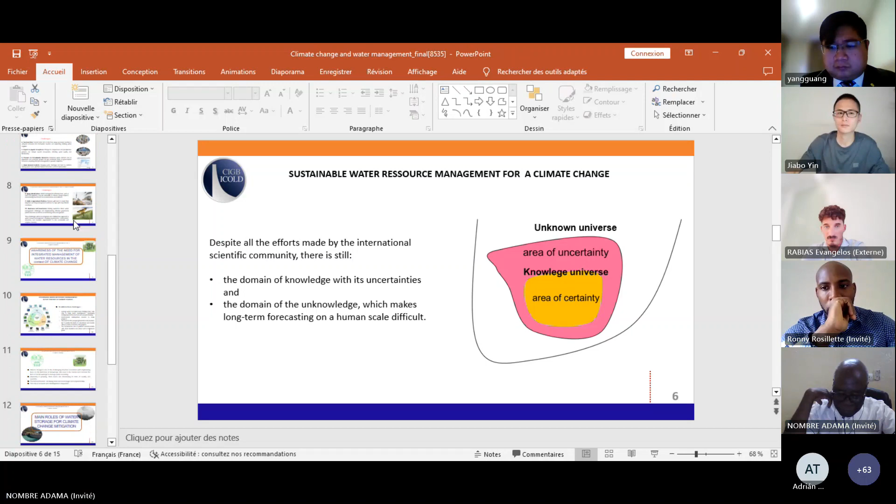The fundamental role of a political decision maker, with short deadlines and values such as maximum profit, is not in adequacy with the scale of thinking, the scale of addressing the global climate change. And we see at the international level the difficulty to achieve agreement, even though we have progress at the international level.

Climate change is one of the challenging situations associated with engineering based on the limitation of knowledge. We need to be careful and consider the best of our knowledge to manage water accordingly, improving our work as our universe of knowledge is enlarging.

Humanity is growing, the needs are diversifying in terms of quality and quantity. The natural hazards are becoming larger and more unpredictable. The role of research and development in these conditions is very important, and I am sure that young engineers are very interested in this area.

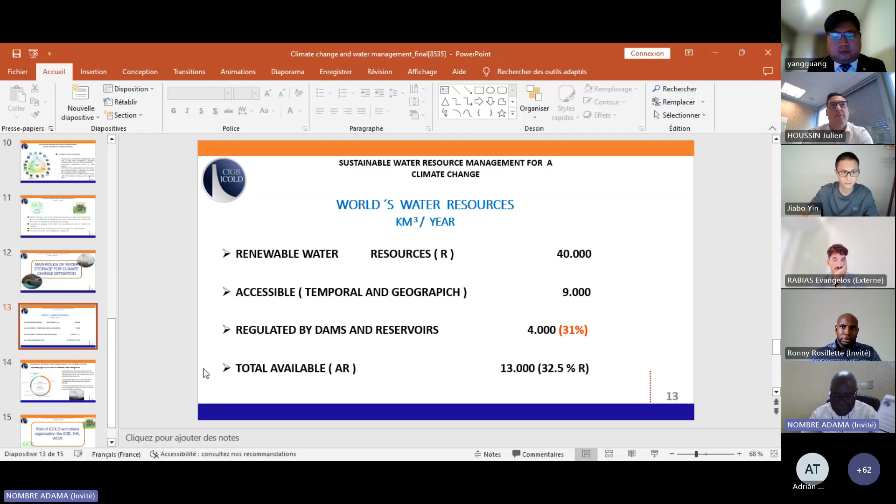I take the example of renewable energy. Solutions are coming, and we need to think globally. We need to extend cooperation. We need to extend understanding between people to get the best result of our process. And to give some data according to the IEA annual report for 2022.

Hydroelectric production between 3,449 and 4,327 terawatt between 2010 and 2021. This represents 15% of the global electricity production. Hydropower represents more than 80% of the renewable energy generation and prevents emissions. Hydro generation prevents the use of wood fuel in less developed countries and reduces the rate of deforestation and CO2 emissions.

And in the context today, we are seeing a lot of progress. Floating photovoltaic panels are becoming important in the area of energy. We also have the development of PSP, not for energy only, but to store water for the different uses.

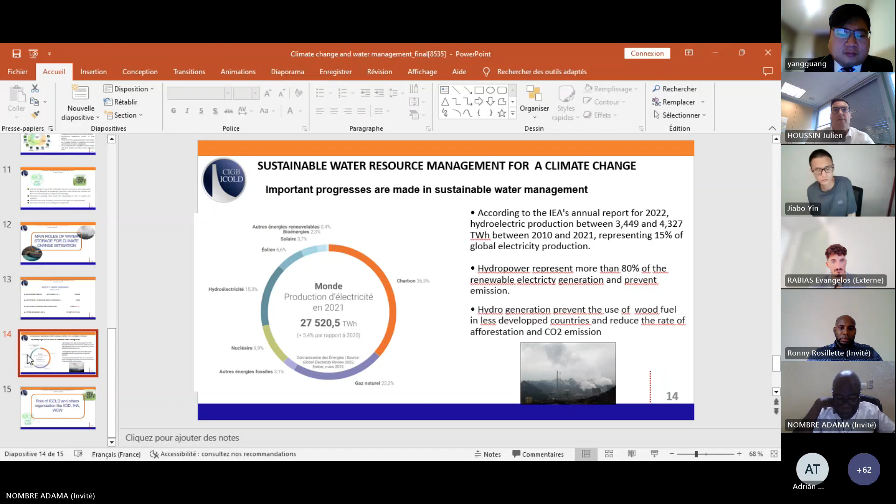And now to end my presentation, I will talk about the cooperation between ICOLD, ICID, IHA, World Commission on Water, who have made a lot of progress. If I take the example of clean water, access to clean water has been recognized and decided by the United Nations as a fundamental right, and it's important for our ethics for the future, also in working within the climate change domain.

And ICOLD also is working hard to contribute by publishing bulletins on dams and environment, by reinforcing capacity building for young engineers, but also for engineers coming from less developed countries. If I take the example of IHA, we have the IHA protocol for hydropower, which is taking an important part of the global climate change, and the United Nations are working hard to increase our knowledge, to reduce uncertainty in the universe of our knowledge.

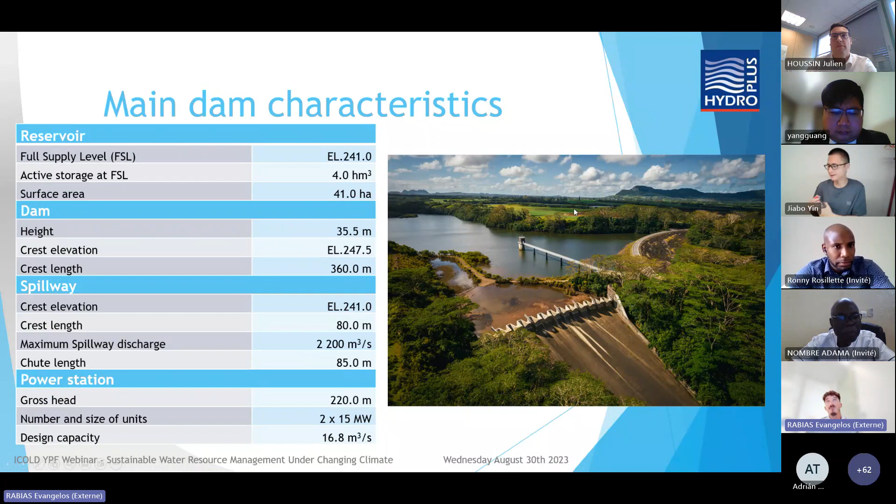The objective of the project was the installation of fuse gates on the spillway crest in order to increase the reservoir capacity by 3 meters, which results in an increase of the storage by 1.36 million cubic meters, which also results in an increase of the power generation from 3 gigawatt hours to 10 gigawatt hours per year. It's not a huge number in general, but for the island of Mauritius, it's significant.

So what were the benefits? More water available, more clean energy from 3 to 10 gigawatt hours per year, a boost in the hydro capacity of the power station due to the increase of the head of the turbines by 3 meters. And this enabled the reduction of the existing thermal energy production, because they have some thermal power plants, and a further reduction of the CO2 emissions by 1,800 tons.

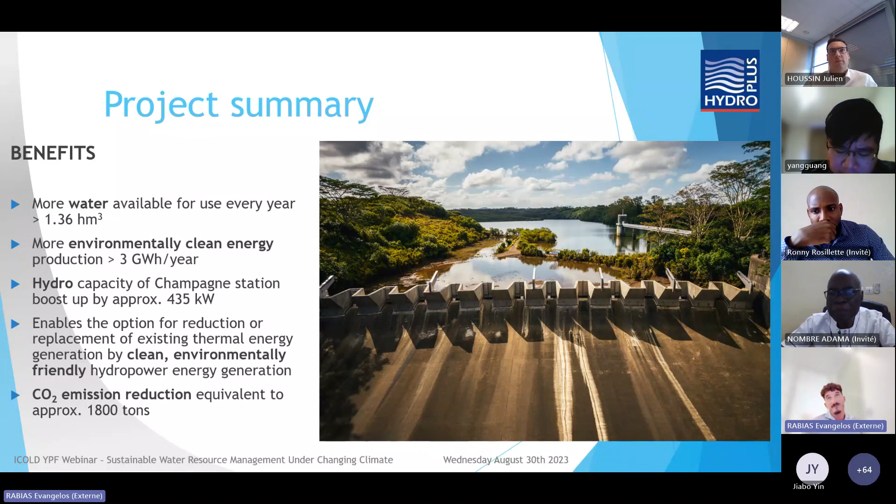The design and the works had a total duration of 12 months. Design was approximately 4 to 5 months, and the remaining 6, 7 months were the works. During the works, we had to develop several methodologies to adapt to the technicalities of the project. Of course, the highest safety and quality standards were enforced. During the works, we had to successfully respond to 3 flood events. They were not minor. They were maybe 10 to 50 year floods. And also we had the COVID restrictions, and we managed to complete the project 1 month in advance.

To talk a little bit about the technical solution, which is the actual innovative element of this presentation, it's the fuse gate system. Fuse gates are freestanding blocks, you can see them here, made of concrete or steel.

In this project, we had a structure, a base, you can see here in the 3D model, that was made from steel, and it was retrofitted in order to match exactly the shape, the curved shape of the spillway. And then we cast in place the concrete walls, and at the end, the well, which is also from steel.

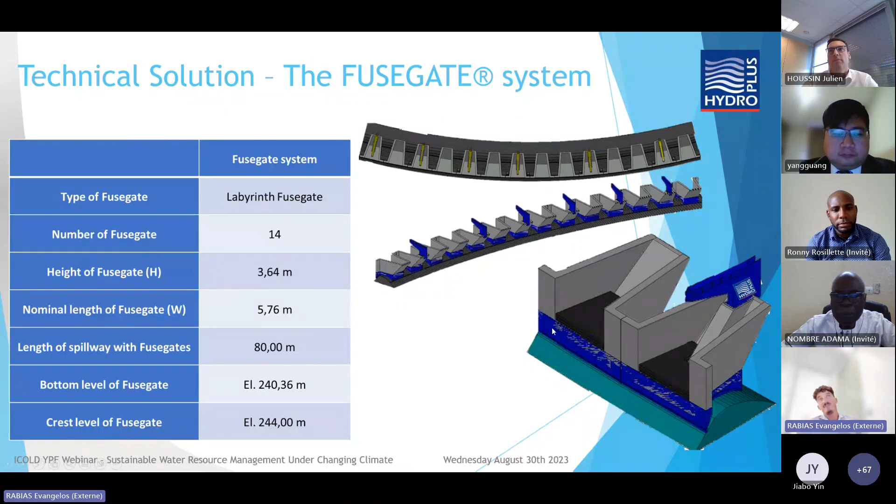from the initial spillway crest, which is here, to the new fuse gates crest, which is here. So all this height is the additional increase in the storage capacity. For this project, we had 14 units, 3.64 meters high, and the shape was labyrinth.

How does it work? For all the normal conditions, water is stored behind the fuse gates. So this is the extra capacity. When we have the normal flood events, water is able to overflow above the fuse gate crest, just like a normal labyrinth spillway.

At the conditions that we have exceptional floods, let's say the 100 years flood, the 500 or the 1000 years flood or above, water will start to overflow over the fuse gate crest, and the reservoir level will start to rise. At some point, it will reach a predetermined elevation, which we design and set during the design phase, and water will start to reach the elevation of the entrance point of the inlet well.

So as soon as the water starts reaching here, it will enter the well, and this well has direct access to the bottom of the fuse gate, which is a hollow chamber that is empty. Water will start to fill up. It will create an uplift pressure, and this uplift pressure will create the triggering mechanism for the fuse gate to be flushed away. How is it flushed?

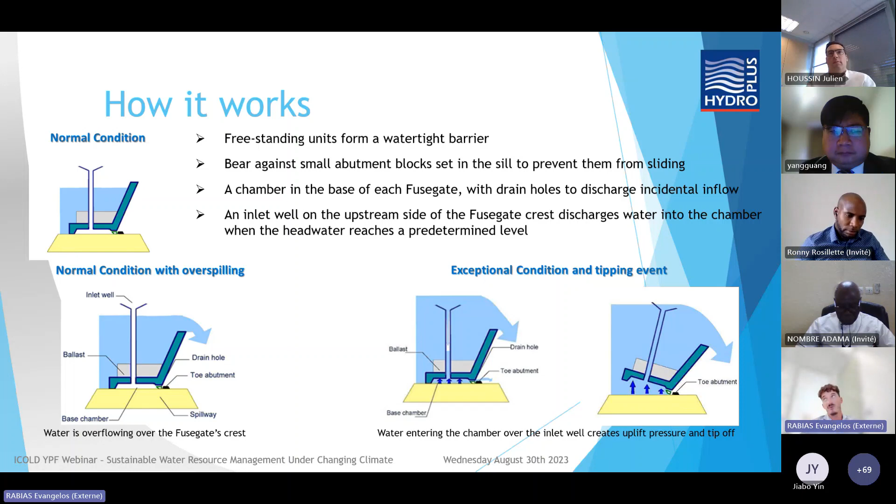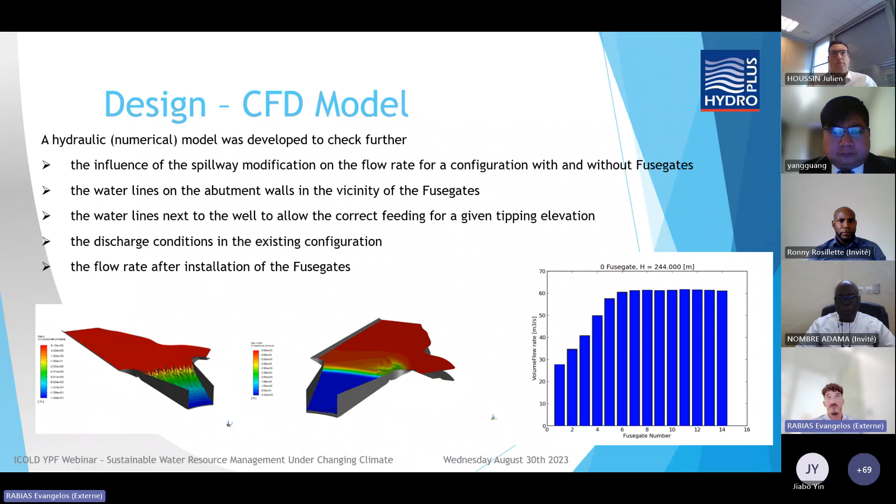So normally, for this project, the first tipping happens for the, I think, 200 years flood, if I'm not mistaken. Before that, before the 200 years flood, all the fuse gates will stay in place. During the design, we developed a CFD model in order to check the hydraulic characteristics of the fuse gates and of the spillway all around.

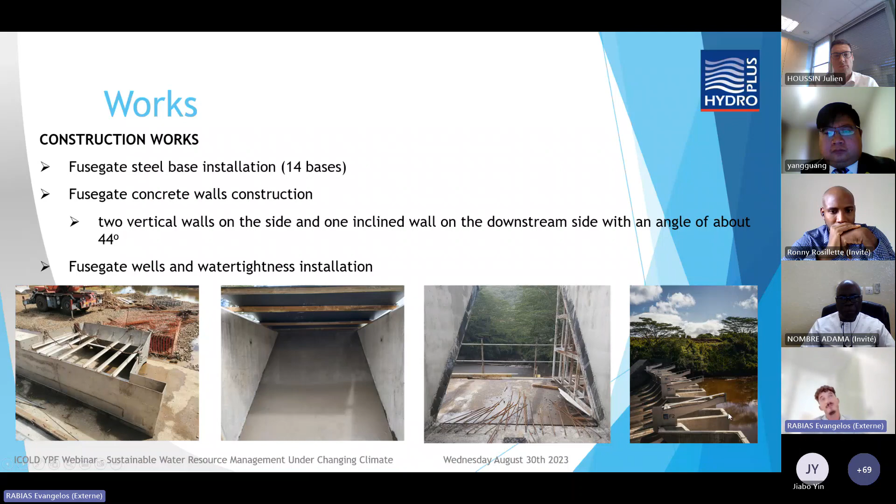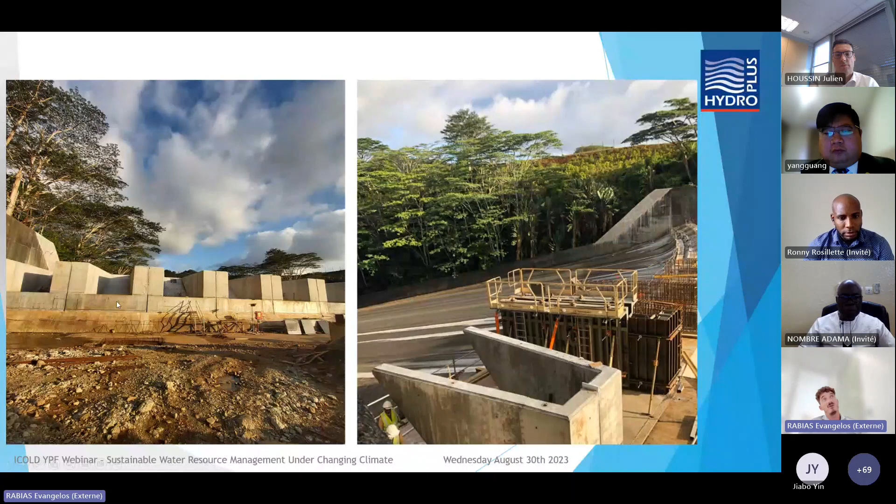Some photos from the construction: the concreting, the start of the concreting of the base and the walls. This is how it looked after the completion of some elements, and this is during the construction of the walls.

To summarize the benefits, the dam was optimized with a cost-effective solution in less than a year. Water storage, sustainable development of water storage infrastructure, optimization of flood management. The overall safety of the dam was enhanced to protect people and properties, and all that without changing the initial characteristics of the dam. Maximum water level stayed the same. All the initial stability design stayed the same. Nothing was changed.

The reservoir capacity was increased, 31% for the dam. More water available, more energy available, from 3 to 10 gigawatt hours per year. A boost in the hydro capacity, a reduction of the thermal energy generation, and a further reduction of the CO2 emissions.

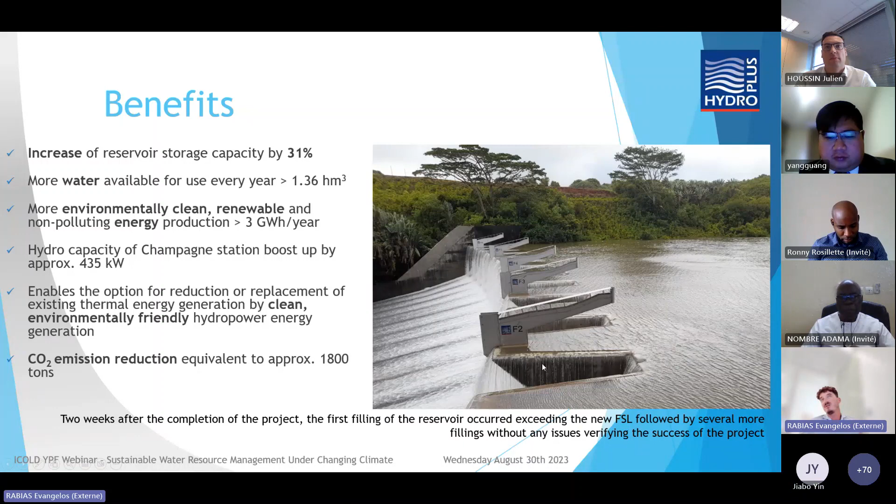On the photo on the right, this is a flood event that occurred, I think, 2 weeks after the completion of the project. We had the flood event, so it was tested right from the beginning. And this is how it works when you have the normal floods. Water goes up to here and flows like a normal labyrinth spillway.

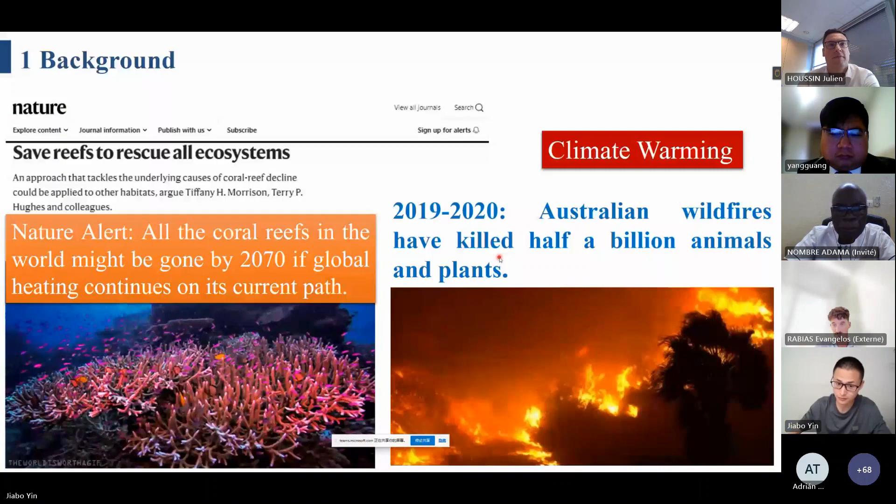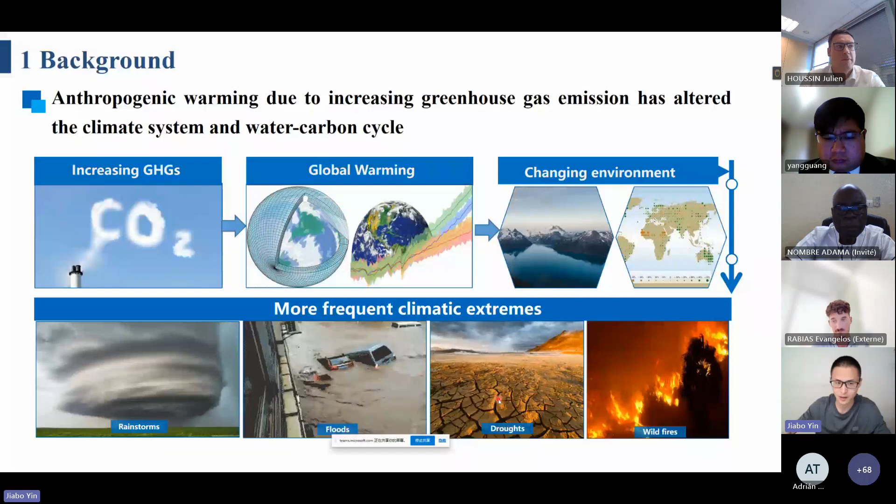The figure to the right shows the Australian wildfire. This wildfire has killed 500 million animals and plants. Due to these events, more attention has been paid to global climate warming. As a young scientist in hydrology, I would like to know the underlying physical mechanism behind hydrological extremes. For example, during recent decades, we observe more frequent and more intensified hydrological extremes, such as precipitation extremes, flooding, droughts, heat waves, and wildfire events. Due to the time limitation today, I will show you some brief examples of our study on hydrological extremes.

According to the Clausius-Clapeyron relationship, which is a physical foundation, we can look at the red curve. According to the Clausius-Clapeyron relationship, the atmospheric water vapor holding capacity should increase with temperature rising. The water vapor is the physical basis for precipitation extremes. And from physics, we know that the saturation vapor pressure will increase with temperature rising. So many people think that precipitation extremes will also increase with temperature rising.

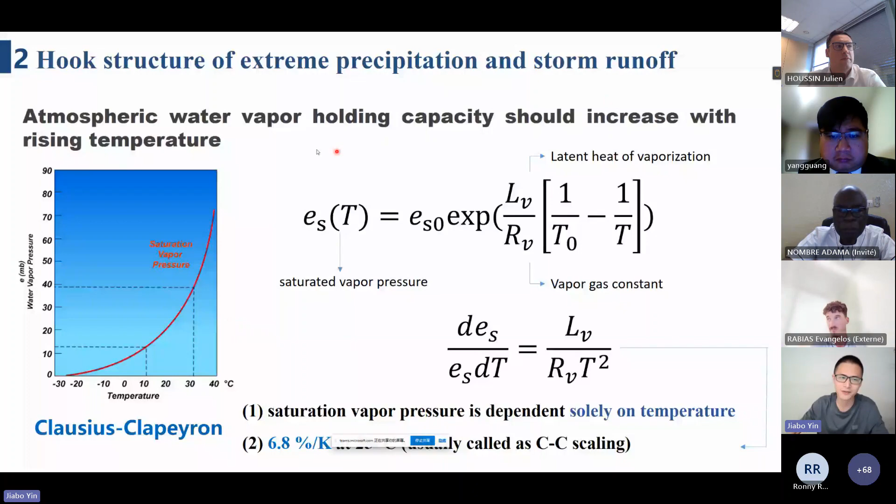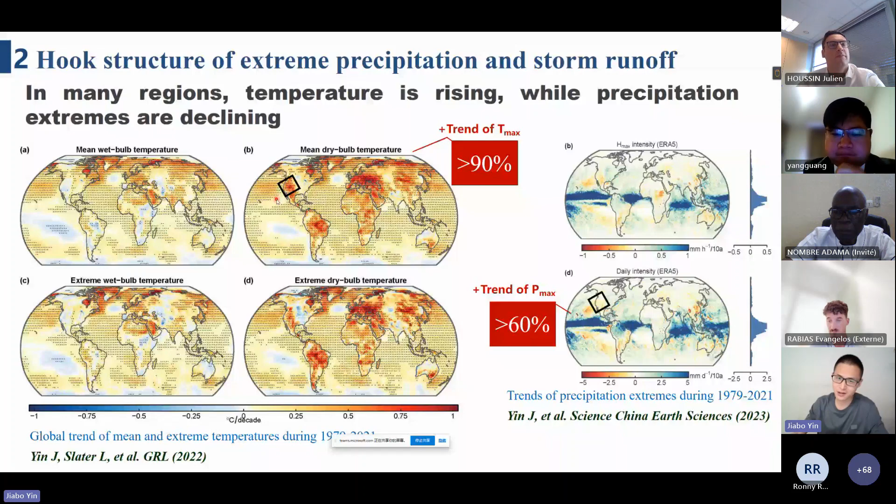However, by using climate simulation and observation, we find that in many regions the temperature is rising, for example, in the Eastern United States, while the precipitation there is declining. So the results suggest that, unlike the physical expectation, the precipitation and temperature relationship is more complicated than our traditional expectation.

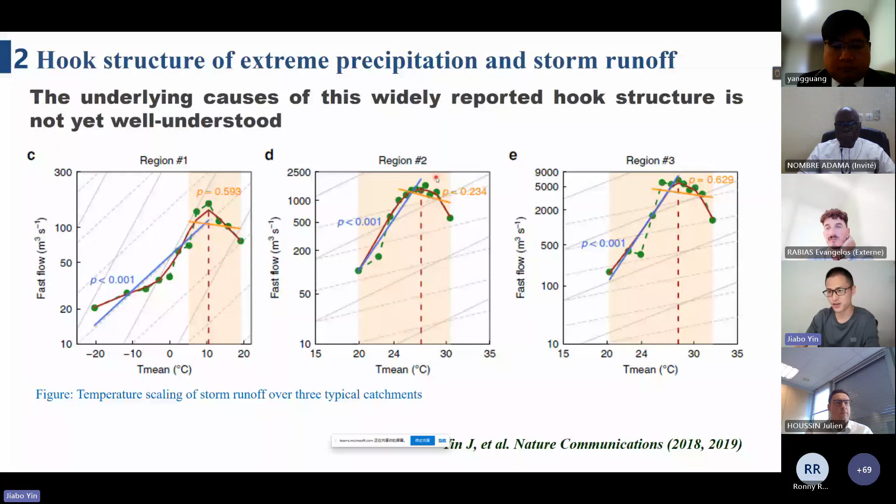However, we find that the hook structures have different shapes. For example, in region 1, the turnaround point is about 10 degrees Celsius, while in region 2 and region 3, the turnaround point is about 26 degrees Celsius. So we find that the hook structure is more complicated. That's why we should try to understand this hook structure.

First, we just try to understand the relative humidity and the energy transport during precipitation extremes. You know, during precipitation extremes, both water vapor and energy transport are very important. So first, we can try to understand the water vapor and the energy transport in precipitation extremes. Because I know many people in this online conference may have little background in hydrology, maybe I will show you some simple examples, okay?

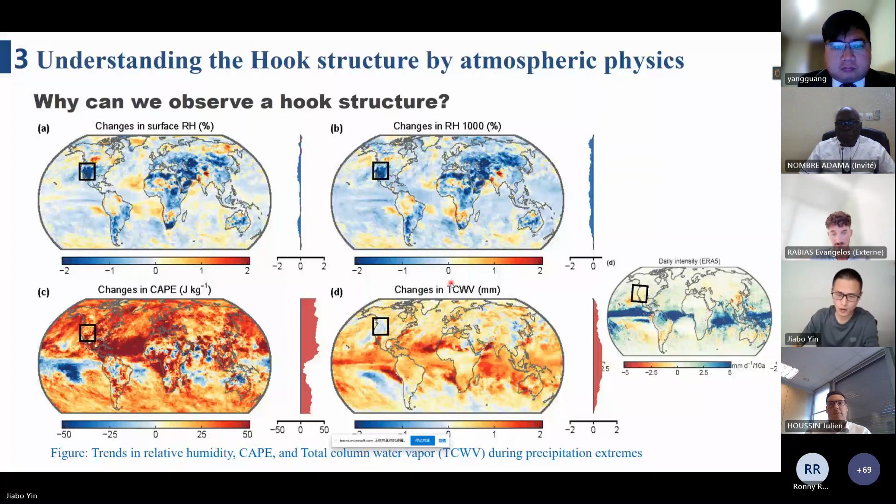For example, in the Eastern United States, the precipitation extreme is declining. And we find that in the same region, the relative humidity during precipitation extremes is also declining, even though the energy for precipitation convection is positive. So the results suggest that maybe the hook structure can be attributed to water vapor availability. So we can try to pay more attention to water vapor availability.

For example, Basin 1, Basin 2, Basin 3 are catchments in China. We find that when the environment is very hot, the relative humidity is also declining in Basin 1, Basin 2, and Basin 3. And in these 3 basins, we also observe a hook structure. But this is different in Basin 4. You can see in Basin 4, the relative humidity does not decline in a hot environment. And it's interesting to find that in Basin 4, we didn't notice a hook structure.

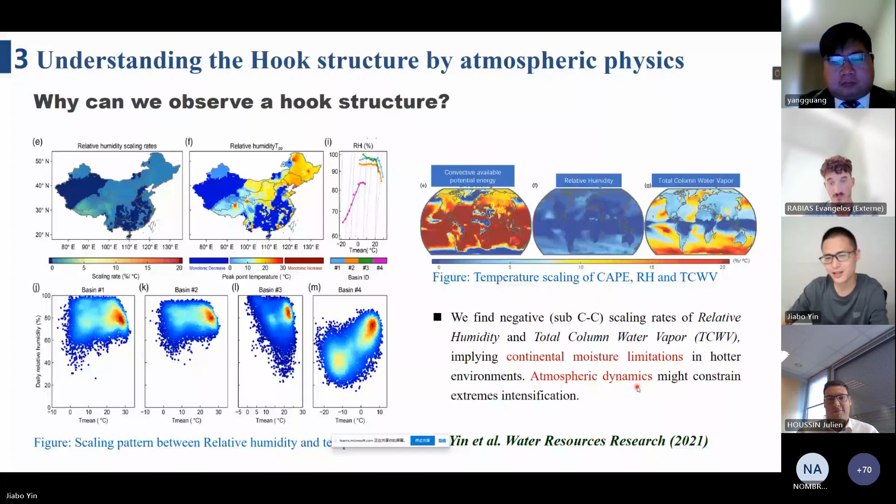All the results suggest that the moisture limitation due to atmospheric dynamics may constrain precipitation intensification. So we can attribute the hook structure to moisture limitation, and the moisture limitation is caused by atmospheric dynamics. Now we raise a new question. Both atmospheric dynamics and atmospheric thermodynamics have a great impact on the hook structure. How to understand their potential impacts is very important.

So we employ a physically based diagnostic model to quantify the thermodynamic and dynamic contributions to precipitation extremes. The physically based diagnostic model is an energy balance model. It can simulate both the local vertical motion and the available moisture in the atmosphere. You know, in a precipitation event, we need water vapor, and the water vapor needs to increase in the atmosphere, and then the precipitation can be generated.

So we can constrain this physically based model to simulate the precipitation extreme event in the atmosphere, and then by formula derivation, we have derived the formula to partition precipitation extremes into a thermodynamic component and a dynamic component. Okay, I know the physical mechanism may be somewhat complicated, so I will try to show you the physical mechanism by using a simple plot.

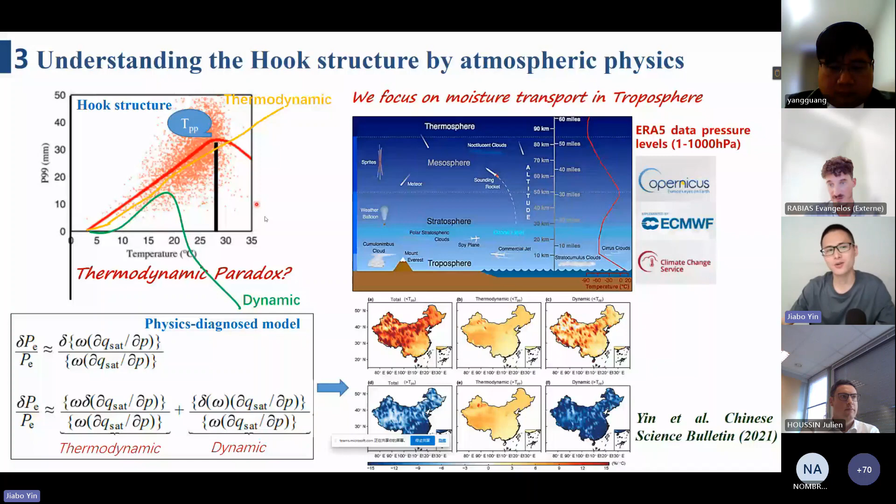That will raise a new question, because the total impacts of atmospheric thermodynamics contribute to precipitation intensification, while the atmospheric dynamics decline precipitation in hot environments. So for a long time, people usually paid more attention to the atmospheric dynamics, because the atmospheric dynamic is dynamic. It changes over time, and it changes under climate change. Less attention has been paid to the thermodynamics.

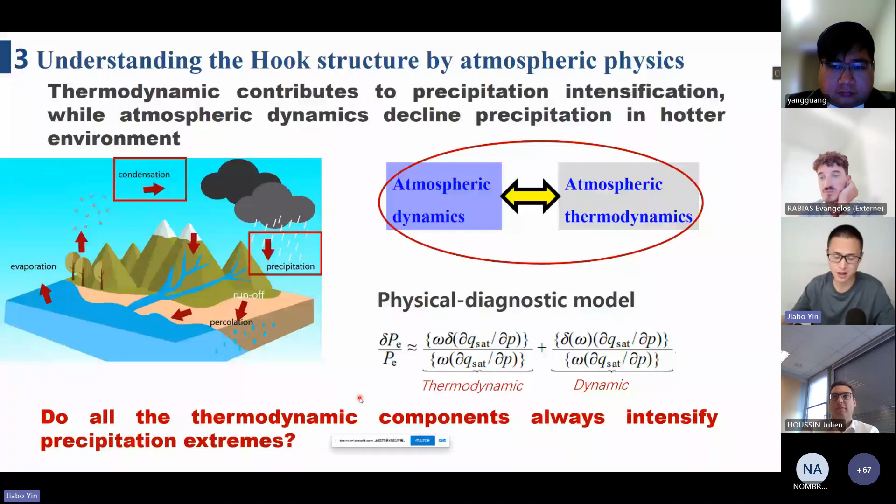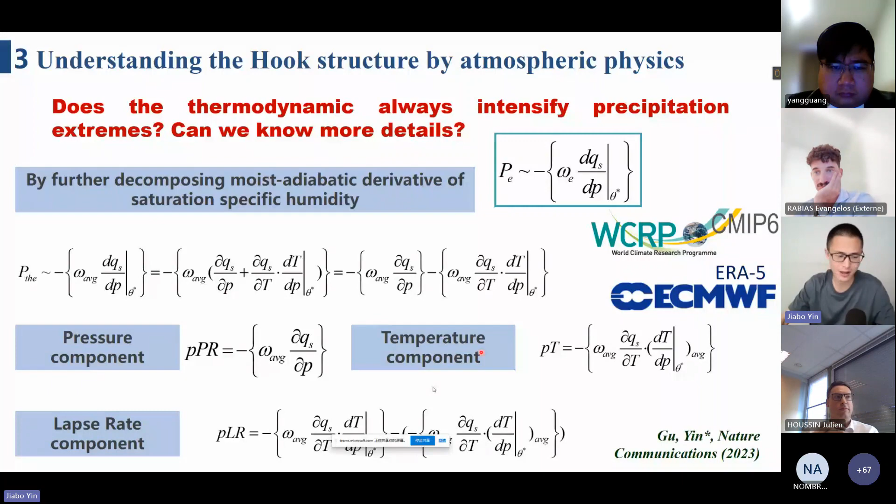But we raise a new question: do all the thermodynamic components always intensify precipitation extremes? This is our recently conceived new scientific question. We can try to answer this question. Okay, I will not show you the mathematics and the formula. I know maybe this is somehow complicated. We just, by further decomposing the moist adiabatic derivative of saturation specific humidity, partition the thermodynamic component into a pressure component, a temperature component, as well as a lapse rate component.

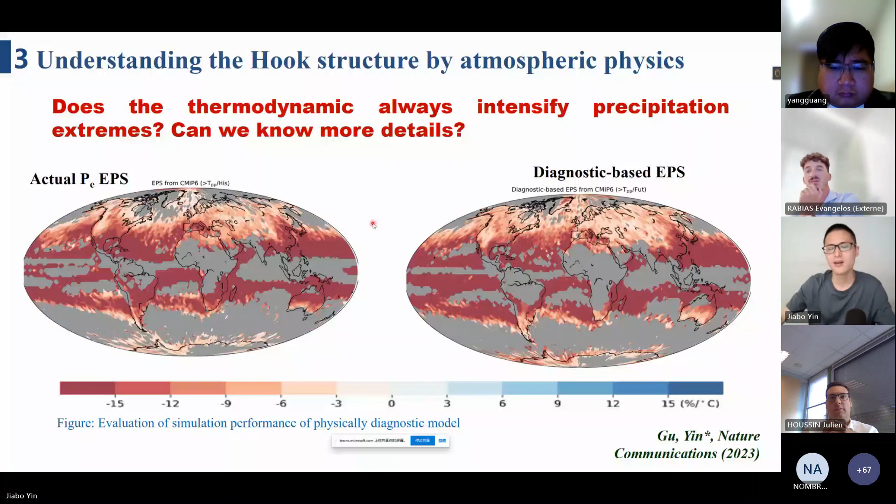Before using our physical model, we need to confirm the performance of our physical model, right? Okay, the figure to the left shows the observation, and the figure to the right shows our physical model simulation. We find that at the same time stage, the two figures are similar. So the results suggest that our physical model has a good performance in precipitation simulation. After confirming the performance of our physical model, we can run the model to answer our scientific question.

And finally, we find that the thermodynamic component does not always contribute to precipitation intensification, because the temperature lapse rate will also change under climate warming. So we can try to use big data such as satellite, reanalysis, observation, and the physical model to answer the question related to the hook structure, and we can attribute the hook structure to water vapor availability.

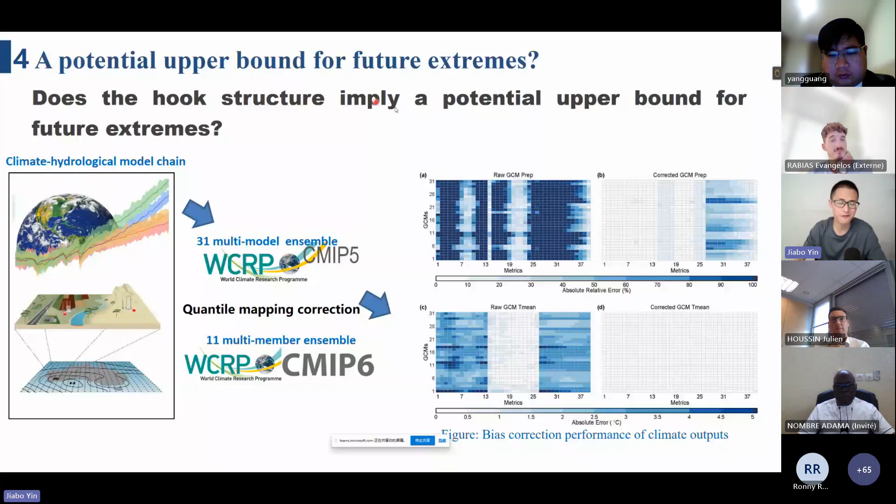Let's go to our last topic in today's conference. We know the hook structure has been reported by many studies, but people usually want to know, does the hook structure imply a potential upper bound for future extremes? To answer this question, we need to project future hydrological extremes. For example, we need to predict future precipitation extremes and future flooding.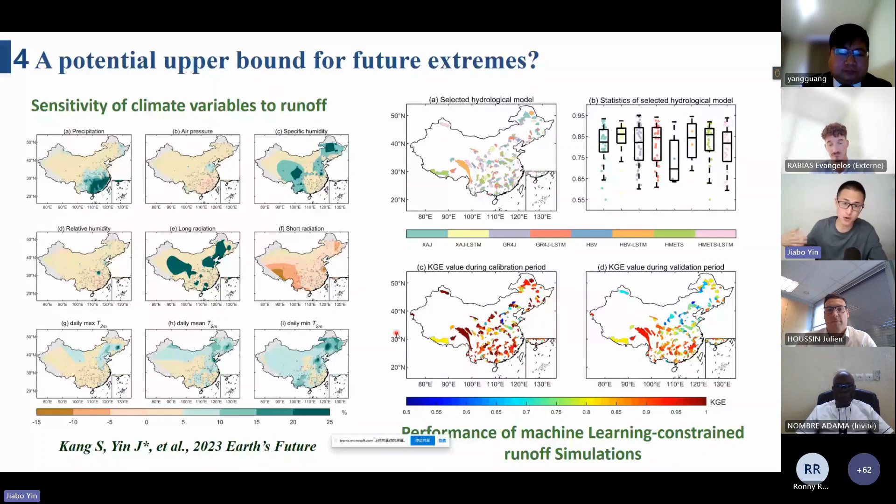We can also try to project the future hydrological elements at a global scale, and we design an emergent constraint method. Okay, the emergent constraint method, maybe you can just understand it as a relation-based method. By using the emergent constraint, we can use the observation to constrain the climate model simulation. So it's a good way to reduce the projection uncertainty. And we find that by using our emergent constraint, we can improve the projection performance at a global scale.

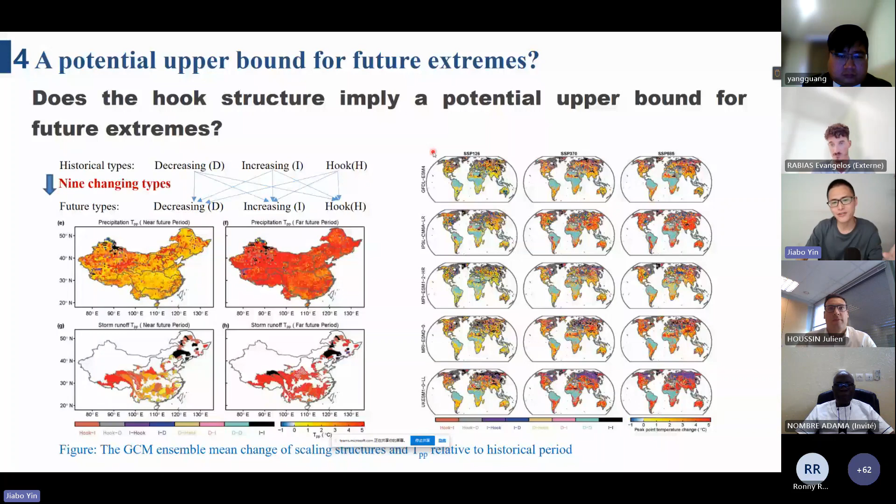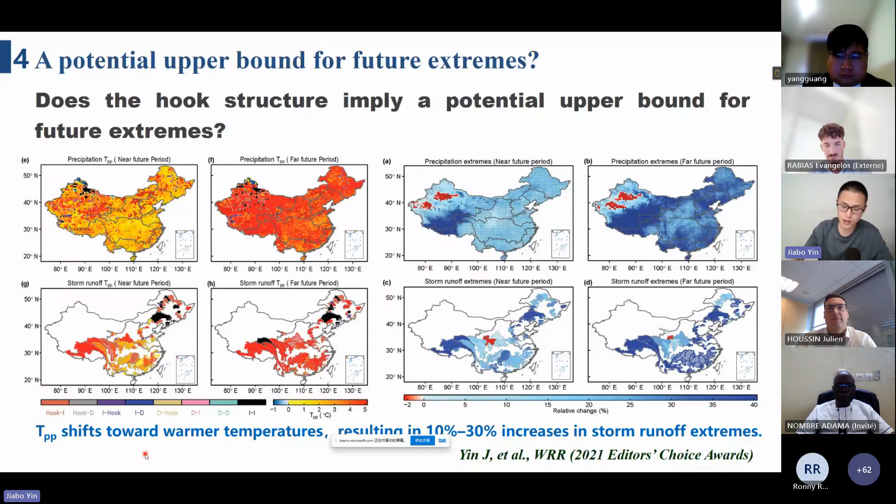And this is just the projection in China. We find that with the change in hook structure, the flooding risk in China will intensify by 10 to 30%.

So let's go to the final conclusion. Precipitation and storm runoff extremes show a hook structure with temperature rising. Atmospheric thermodynamics intensify precipitation extremes, while dynamics decline precipitation in hot environments. The thermodynamic component does not always contribute to precipitation intensification due to changes in temperature lapse rate. And more importantly, the hook structure does not imply a potential bound for future extreme intensification.

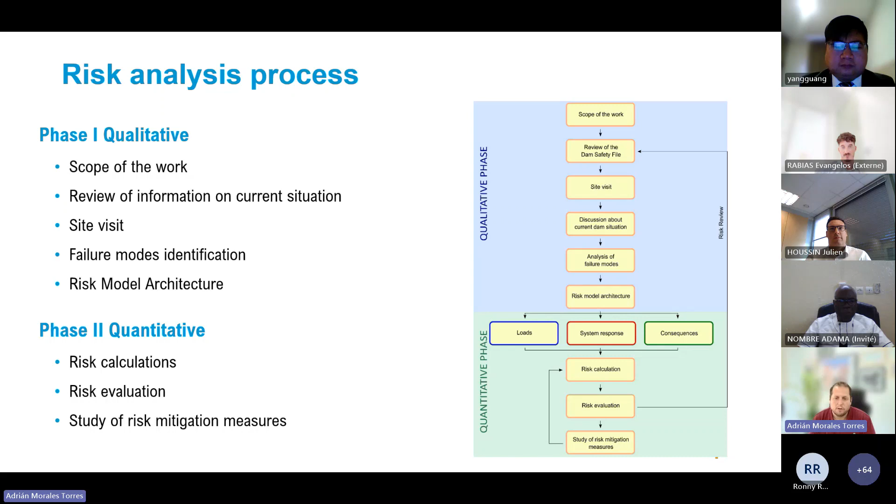So this is an example of the failure mode identification process. As I have said, during this process, we put together the dam owners, different experts, people that know the dam, and all together in a workshop of several days, usually 2-3 days per dam, we identify what failure modes could happen. We also classify those failure modes, and based on that, we also make some recommendations to avoid the failure modes and to analyze them.

Then we build a quantitative risk model. A quantitative risk model is just a mathematical tool. In general, we use event trees, but also other mathematical tools can be used. But it's a way to combine, to analyze all the different possibilities, all the different failure modes that could lead to the dam failure. And then what is the probability? We can calculate the probability of each one of these failure modes, and then what will be the consequences that will be produced if these failure modes happen.

And the main advantage and the strongest point of these quantitative risk models is that they are able to integrate all the info related with dam safety. So in dam safety, we have floods, we have hydrological studies, so we introduce that data within the flood node, where we introduce the probability of having different floods and the magnitude of these floods. Then we have earthquakes, so we also introduce that in the loading part. Then we have hydromechanical assets, so we also introduce different cases considering the probability of not being able to operate the gate because we have any kind of mechanical or electrical problem. We also have the operational rules, so we also analyze how we operate the gates and what will be the maximum water levels reached in the reservoir for each one of the cases.

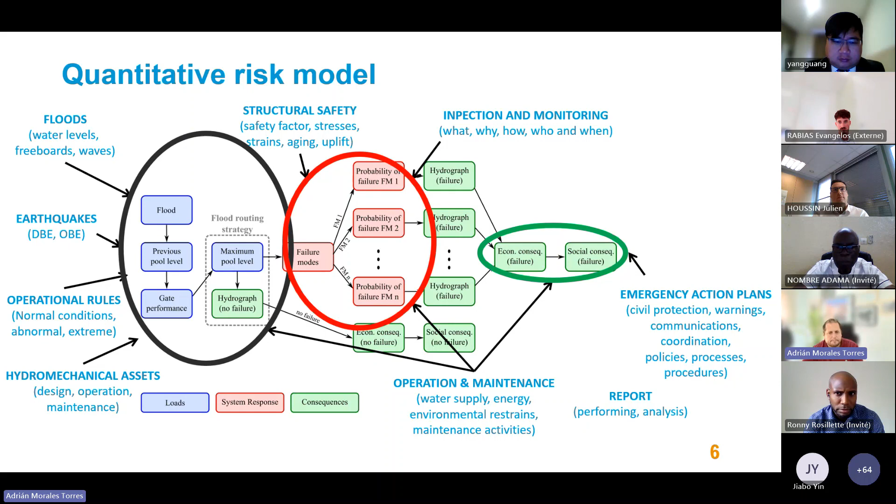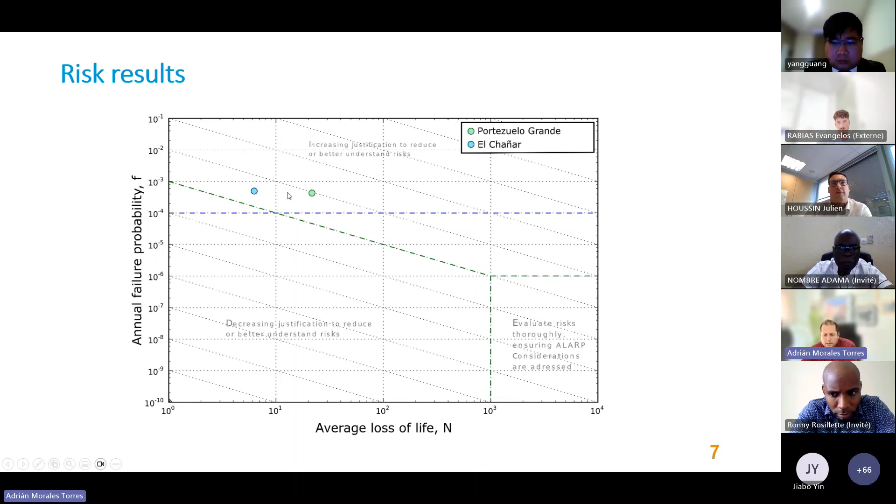So finally, we can evaluate different types of risk reduction options. In this case, these are two dams in Argentina, and we were evaluating 5 different risk reduction options. And we can combine the risk results with the cost of each one of the measures that we want to analyze, and then prioritize them, looking for the measures that allow us to reduce the risk more at a lower price. So then we will see what is the best way to lower the risk of the dam and to bring it aligned with the international recommendations.

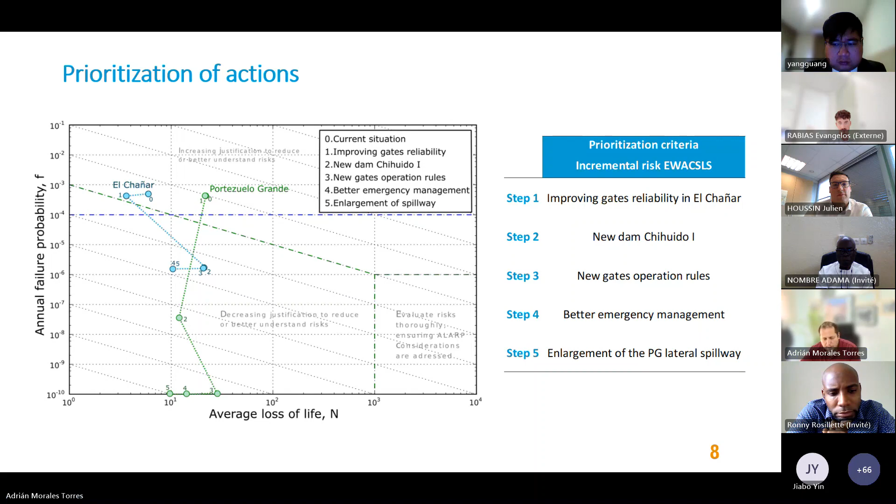This was an example only with 2 dams. We have applied this in several cases. We are also working now with the Spanish government to apply the methodology and the prioritization for all the main 300 public dams in Spain. And this is an example when we apply it to 27 dams. As you can see here, we have very different dams from very different typologies. And we can obtain this type of results.

In this group of dams, for instance, they were planning to implement around 95 different risk reduction measures, structural and non-structural. The total budget of these 95 measures was more than 60 million euros. So prioritizing following the risk methodology and the risk assessment, we can see that only with 3 million euros of these 60 million euros, we can already reduce the risk in the portfolio more than 1 order of magnitude.

And we can see that after implementing the first measures of the sequence, after spending around 20 million euros, the reduction of the risk that we achieve is more residual. So that shows us how risk-informed decision making and implementing measures following risk results can help us to be efficient in spending the money and in implementing first the measures that help us to reduce the risk in our portfolio the most.

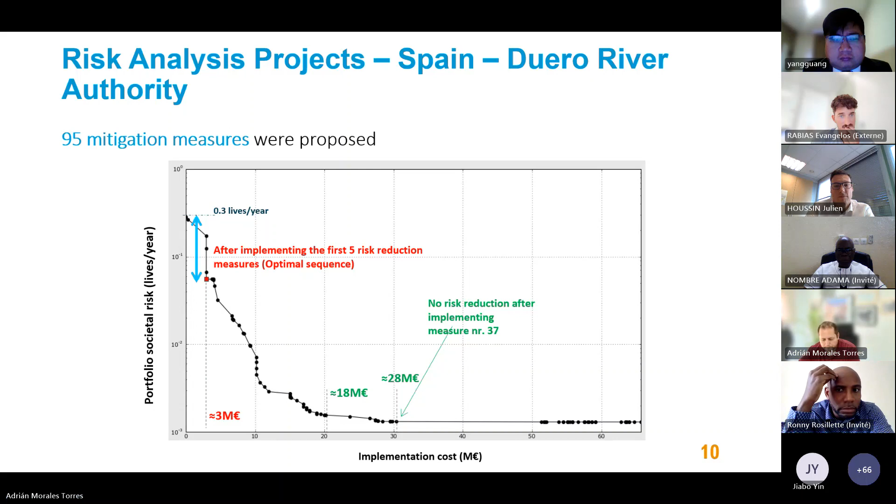So also we can get other benefits when we apply risk methodology. For instance, this is the case that I was explaining in the ICOLD conference in Sweden. It's a case of a dam in Colombia where we used risk results to define the gate operational rules and to be sure that with those operational rules, the dam owner can demonstrate that they are operating in a way that minimizes total flood risk downstream.

They also improve the dam safety, reducing the probability of overtopping, and they are also accounting for climate change. Finally, reinforcing the legal protection in case of any kind of flooding and problems downstream. Because we estimate the consequences that will be produced for different probabilities, including failure and non-failure cases, and we look for the best strategy to operate the gates to minimize that.

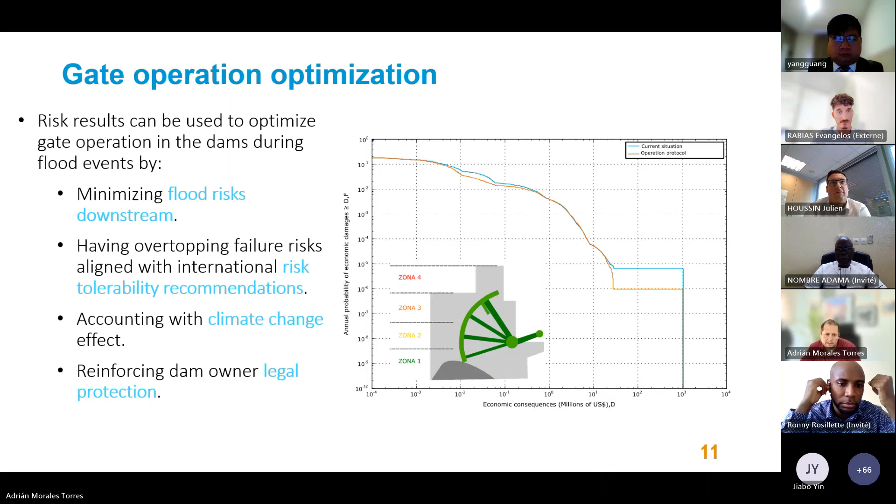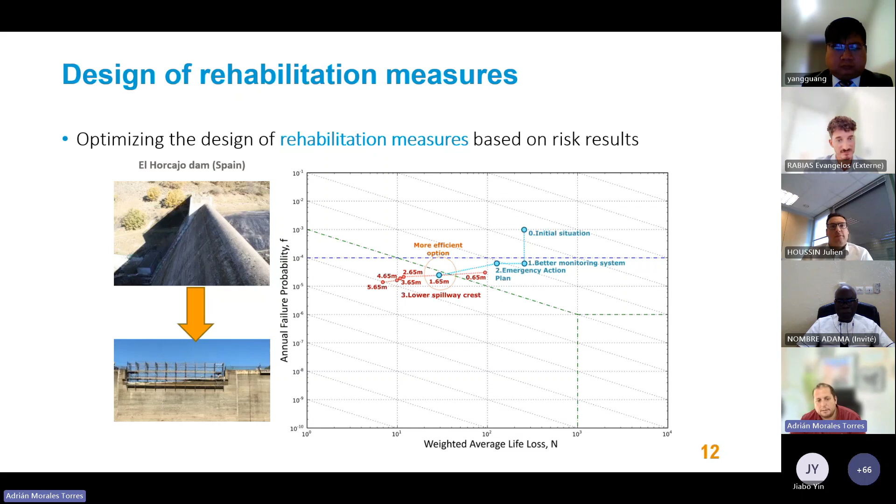We can also define rehabilitation measures, optimize rehabilitation measures based on these results, looking for the best way to align the dam with the tolerability recommendations without spending too much money. So all the previous slides will be more focused on risk management, and this is how we use these results also to evaluate climate change.

The thing is that climate change is related with several of the input data that we have defined for the risk model. It seems that climate change is producing a higher frequency of extreme flood events. It's also having an effect on the pool levels in the reservoir, because if we have less resources available in the future, then pool levels will be lower in the future, and that can have an impact also on dam safety. It can produce also changes in the social and economic areas downstream, so we can also have changes along time due to climate change in the downstream population and in the consequences downstream, and also degradation of the dam or other type of equipment.

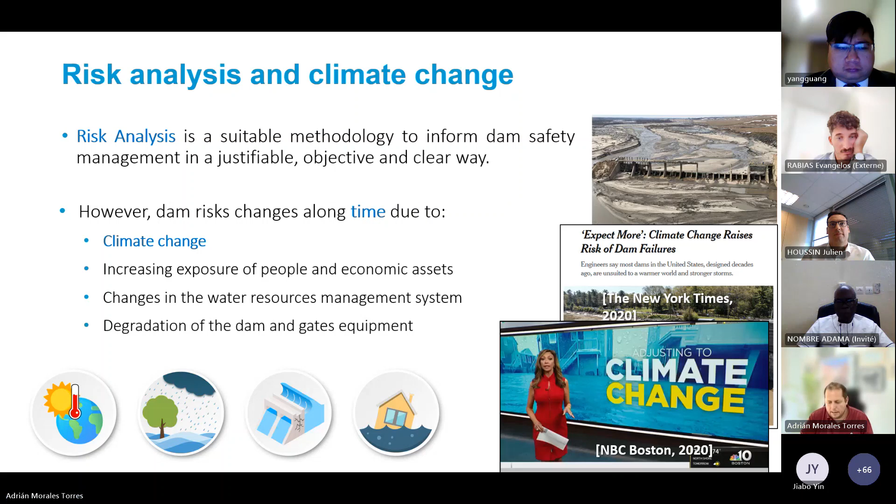So what we do is we compute risk for the current scenario, and then we recompute risk considering the effect of climate change in the input data in the risk model. So we obtain this type of results where this is, for instance, a case that we estimated some years ago, where for the different climate change scenarios, we could estimate risk in the base case, in 2019, and then for the different future scenarios, we could estimate how the risk in the dam was going to change.

So we can see that in this case, the probability of failure was going to increase because it was expected to have higher flood events, and that was going to produce higher pool levels and an increase of the probability of failure for the overtopping and sliding failure modes. This is a concrete gravity dam. And on the other hand, we also had lower consequences because this dam is located in a rural area in Spain, so we expected to have less population in the future in that area.

Then with these results, we can evaluate how this changes along time, and we can obtain the risk reduction benefits today for the reduction strategy that we want to implement, but also what will be the benefits in the future, because we not only calculate the risk today, but we also consider different future scenarios. And we can compare these benefits, economic benefits and social benefits, with the cost that this measure has. So not only the cost of implementation, but also other types of cost, like maintenance cost along time.

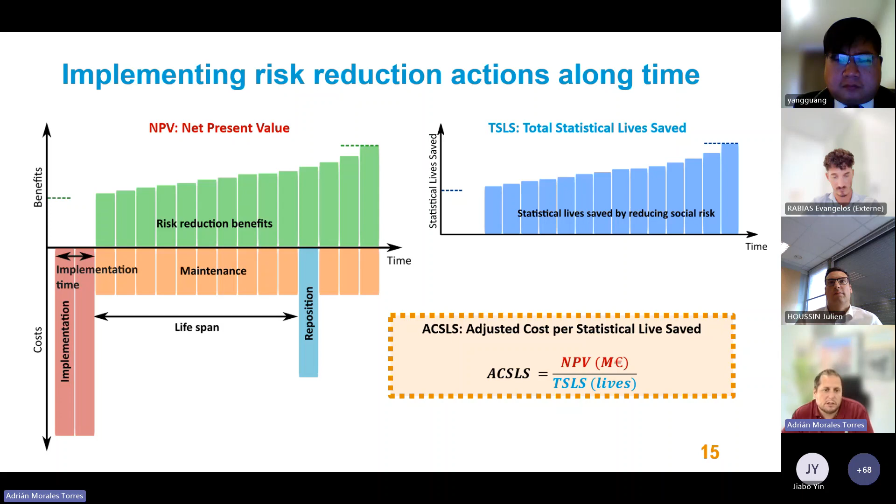So finally, we can do this comparison between the cost of each measure and the benefits of the risk reduction of each measure, and we can evaluate what is the most efficient measure to be implemented, considering the changes in the risk and considering climate change.

So finally, we will obtain this type of results where we have the risk today, how we can reduce risk by implementing the different risk reduction actions, what will be the prioritization of these actions, and what will happen if I don't do anything. So then I can demonstrate why I'm doing that prioritization, why I'm implementing the measures in that way, and also for dam owners, it helps them to demonstrate why they are investing in dam safety and what will happen if they don't do that type of investment.

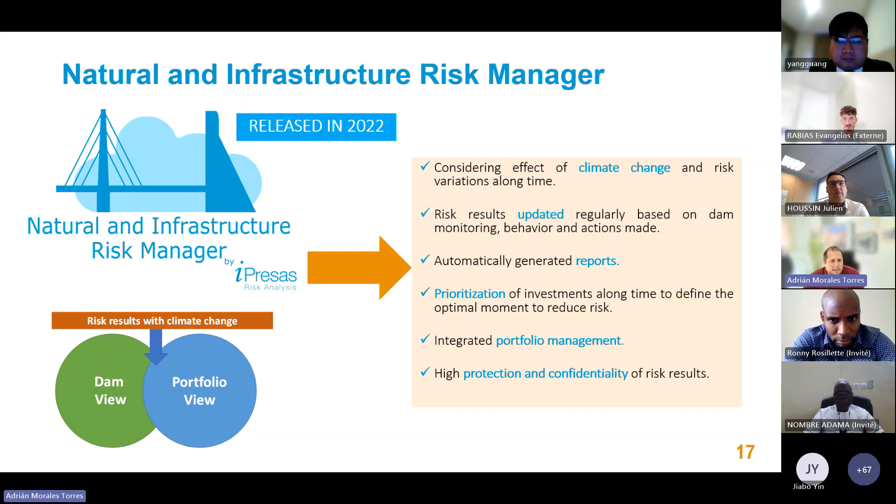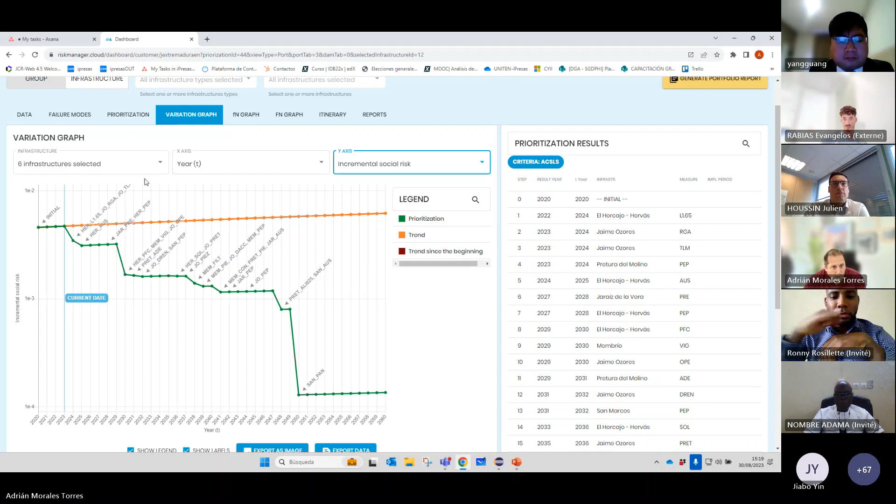Finally, to end my presentation, I wanted to show you a platform that we have developed to do that, where we introduce the risk of the different dams, the change of risk along time considering climate change, and then we can prioritize and obtain this type of results. This is, for instance, 6 different dams in Spain, and this is the failure probability of the 6 dams together, but we can represent also the incremental social risk, for instance, and we can see how by implementing the different risk reduction actions, we can reduce the risk.

As expected, the first actions in the sequence are the ones that help me more to reduce the risk, and then how I distribute the different actions that I have planned for these 6 dams along time. And also what will happen if I don't do anything.

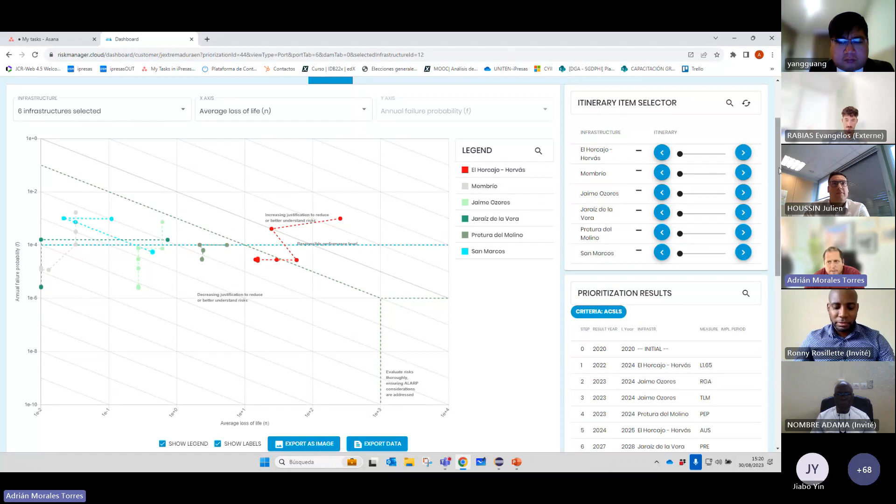So I can see how here I can reduce risk more than 3 orders of magnitude, thanks to implementing this type of actions. And I can also see that in this type of consequences-failure probability graph, where I can see how implementing the different actions along time will help me to bring the dams to the tolerable area.

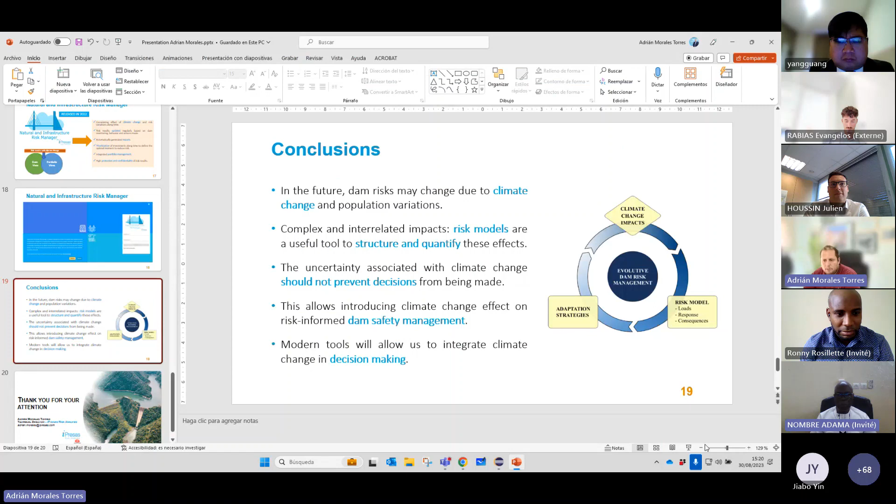So yeah, that will be the end of my presentation, just to highlight the importance of also considering climate change when we are doing a risk assessment. Of course, there are uncertainties on climate change, and we can have different results depending on the climate scenario that we use, but these uncertainties should not prevent us from using those results and using climate change in decision making.

And the risk management framework is a very good framework to introduce the effect of climate change in the different parts of dam safety and to help us with decision making considering long time scenarios.

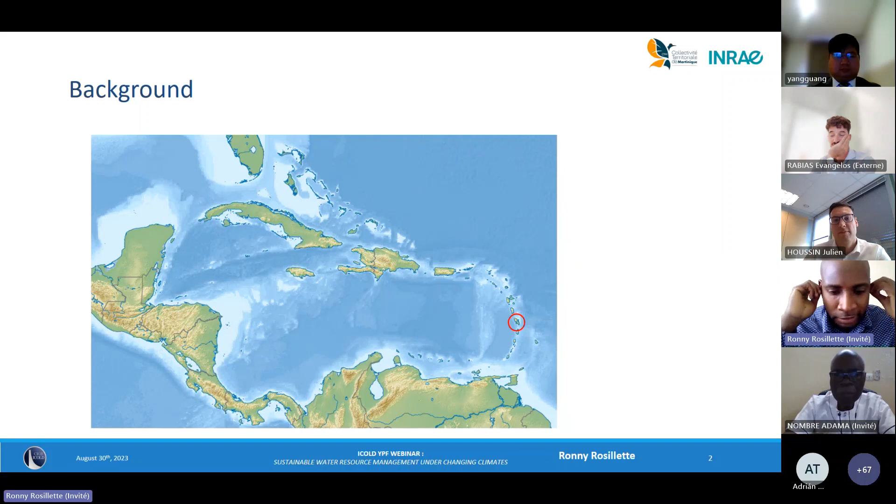So when we look closer at the island, it can be divided into two main areas, the northern part and the southern part. The northern part is mountainous, mostly covered by tropical rainforest, and it's also the main source for the island's rivers. There are around 171 rivers in this part of the island. And the annual rainfall varies from 5,000 to 10,000 millimeters.

While on the other side, the southern part is drier, there are fewer rivers, and it receives less than 2,000 millimeters. So Martinique, regarding the context, the island became an overseas French department in 1946. Before that, it was a French colony.

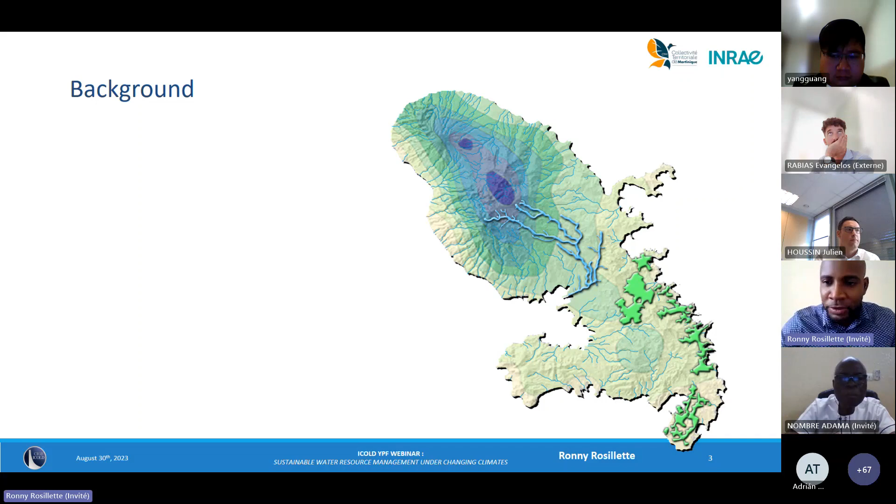And the shift led to multiple consequences, like a deep social and economic crisis, social movements, migrations from rural areas to urban areas, emigration to mainland France, elevated poverty and high unemployment rates. So it happened in the 1960s.

And in addition to that, repeated droughts in the 1970s, which lasted 8 years, from 1970 to 1977, especially in the Southeast region. And this led to a 15% decline in total agricultural production.

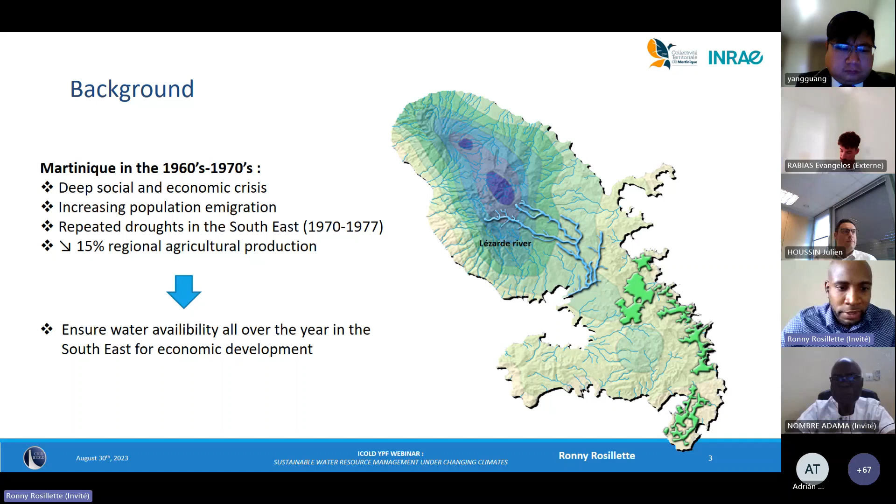So after that, it was decided to create a new hydraulic infrastructure project in order to develop agriculture in the Southeast, for economic development. So the first thing is to ensure water availability in this part of the island. So this is how they created the Southeast irrigated area in 1980.

So the water is collected from the north in the Lézarde River, and then moved to the south, here in the irrigated area in green, through a 30 kilometer water pipeline. Here. So the water is collected here, supplied here, and stored here in the Manzo Dam.

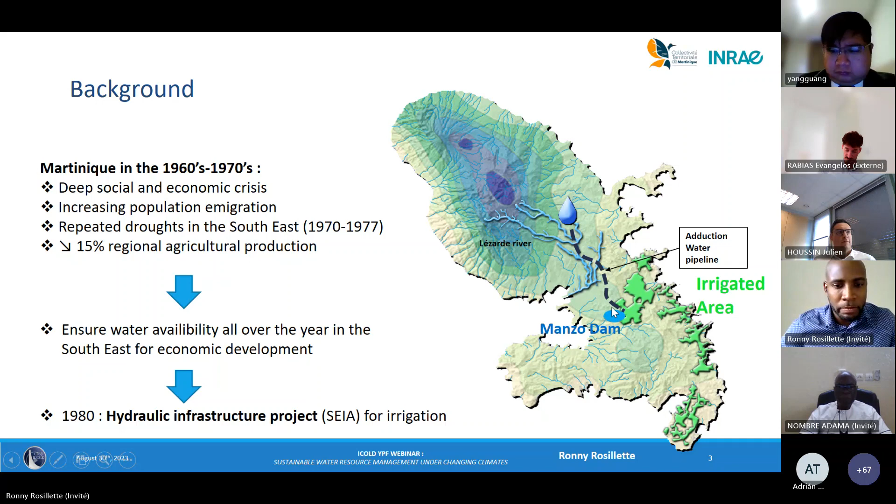So how does it work? Let's talk about hydraulic processing. So the water is taken from the Lézarde River in the north, up to 1,000 liters per second, through a water intake. Then it passes through a sand trap and then to a pumping station. So the water is lifted to a head reservoir, which is 40 meters higher.

So here we are still in the north part of the island, to the Deux-Terres head reservoir. And from there, the water flows down by gravity through the water supply. Here, from 20% to 25% of the water is directed to water treatment plants, so for drinking water purposes. And the other one is for agriculture.

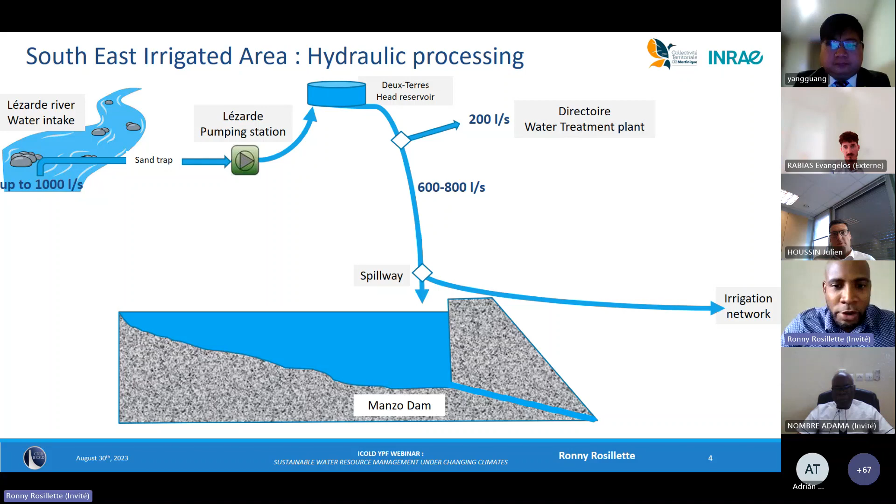So there are two types of irrigation for agriculture. Direct irrigation, which happens during the rainy season, when the river flow in the Lézarde River is increasing to meet all demands for agricultural purposes and drinking water purposes. And indirect irrigation, when the stream flow in the Lézarde River is decreasing. So this is the water stored here in the reservoir, which is used to supply the irrigation network. So there are two types.

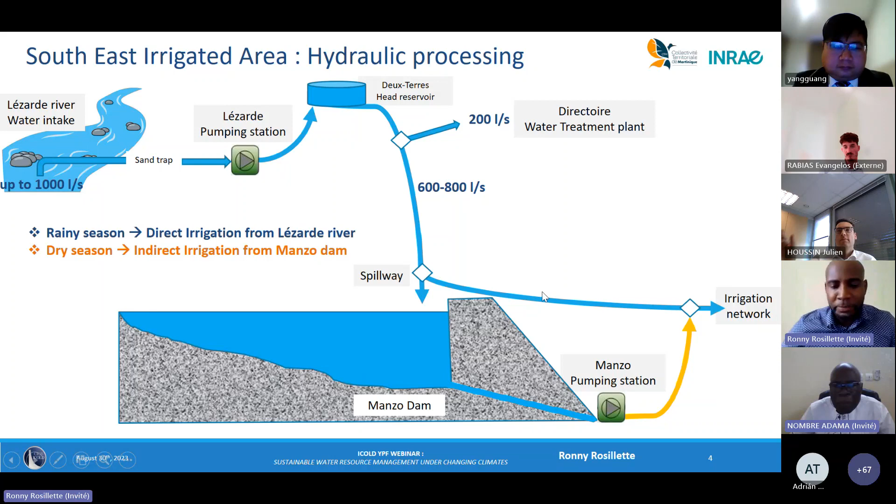Regarding the Southeast irrigated area, it covers around 8,000 acres across 7 municipalities. There are about 550 customers, 150 kilometers of water network, 330 irrigation hydrants, and a larger dam, the Manzo Dam, which is here.

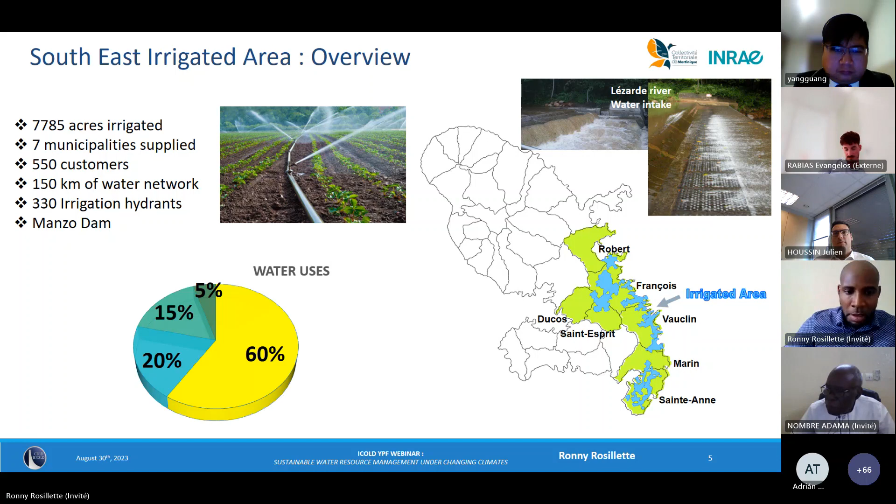And about the water uses, in the 1990s, it was split equally between banana crops, livestock farms, and vegetable crops, 1/3 each. And today, bananas represent over 60% of the water uses. So this is a significant growth over the last 3 decades. And I have to say that bananas require a large amount of water to grow. So it led to a significant increase in the water demand today on the irrigated area.

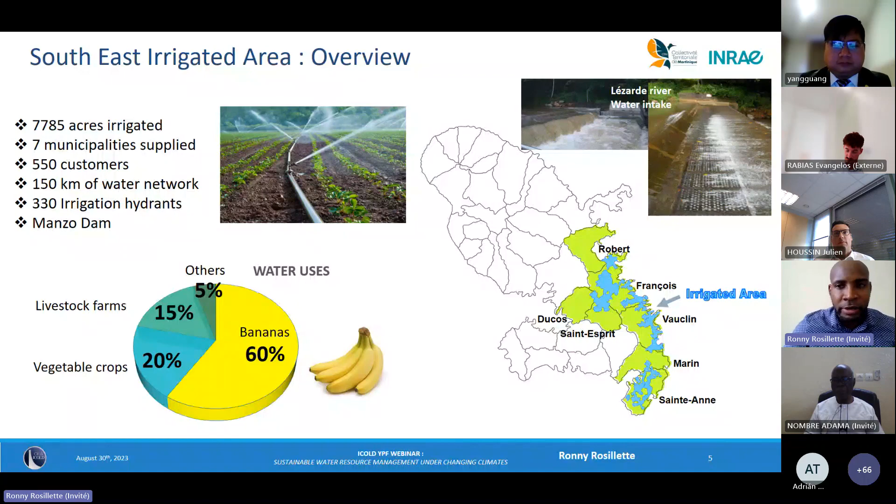Regarding the dam, it was constructed in 1979. It's a rock-filled embankment dam with a central clay core. The dam owner is Martinique Territorial Authority, so it's a dam owner and operator, and we receive technical support from INRAE. It's 365 meters long and 27 meters in height. Its fill volume is about 300,000 cubic meters. Its reservoir surface covers 200 acres and has a capacity of 8 million cubic meters.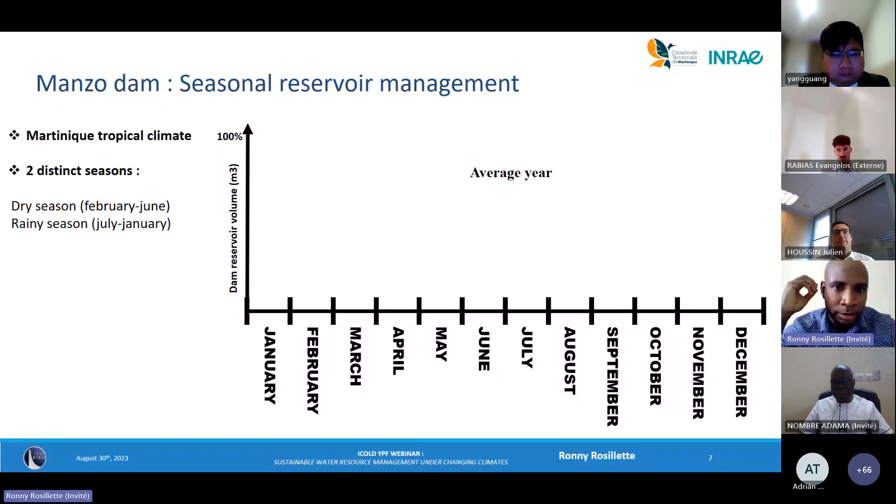So in Martinique, in the Caribbean, there's a tropical climate with 2 distinct seasons. The dry season, we call carême, runs from February to end of June. And the rainy season, we call hivernage in French, runs from July to January. So the Manzo reservoir management is seasonal, relying on the seasons, with a draining phase which lasts for 6 months, followed by a filling phase.

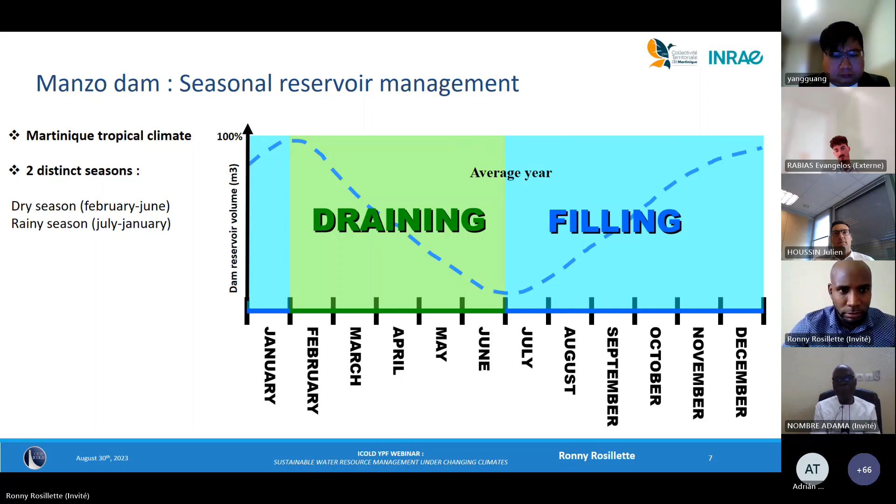Regarding the hydrological regime, we collected data over the last 60 years, from 1962 to 2020, and it's clearly showing that the Lézarde River has a tropical stream flow variability, with dry cycles here from January to June, and the wet cycles here. So during the dry season, the stream flow can drop to 0.3 cubic meters per second during the low flow.

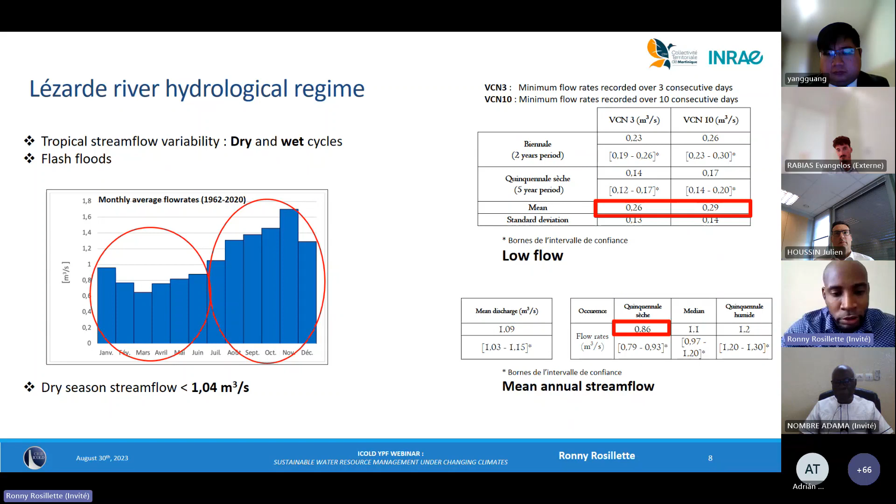And we noticed that on the southeast irrigated area, when the stream flow goes below 1 cubic meter per second, the water resource availability is limited for irrigation supply, and is available only for drinking water supply.

So this graph shows the reservoir storage variation during a particularly wet year in 2012. The red line is the maximum reservoir capacity, 8 million cubic meters. The yellow line is the real volume during that time. And the green and blue lines are 2 inflow simulations based on the cumulative volume available from the Lézarde River.

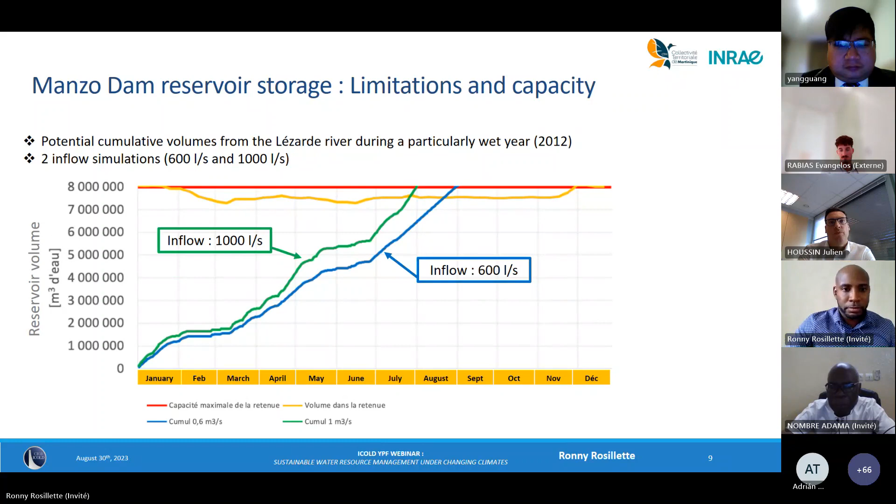And what we see is with the current inflow, 600 liters per second, it takes 8 months to fill up the reservoir. And with a higher inflow, 1,000 liters per second, which doesn't exist actually, it takes 1 month less, so 7 months to fill up the reservoir. So with those simulations, this is a minimum time to fill up the Manzo reservoir, and this is the potential volume available to do it.

Here is a reservoir storage variation during a specific drier wet season which happened in 2011 from July to December. So what we see is even with a higher inflow simulation in green, we cannot fill up the reservoir to its full rate. We reach 56%. So in this case, it's clearly showing that there is a lack of significant resource available for irrigation supply on this island.

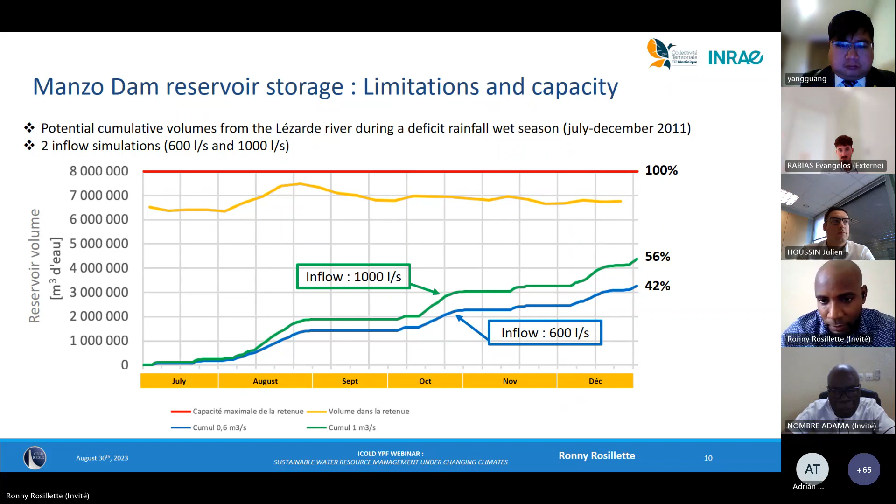So let's step back. Here are the variations of the last 12 years, from 2009 to 2021. And I have to say that for the first time in the Southeast irrigated area, we faced 2 consecutive severe droughts. In 2019, the reservoir dropped to 13% here and 8% in 2020. And then it was followed by a drier wet season in 2021 here. So it was a critical time.

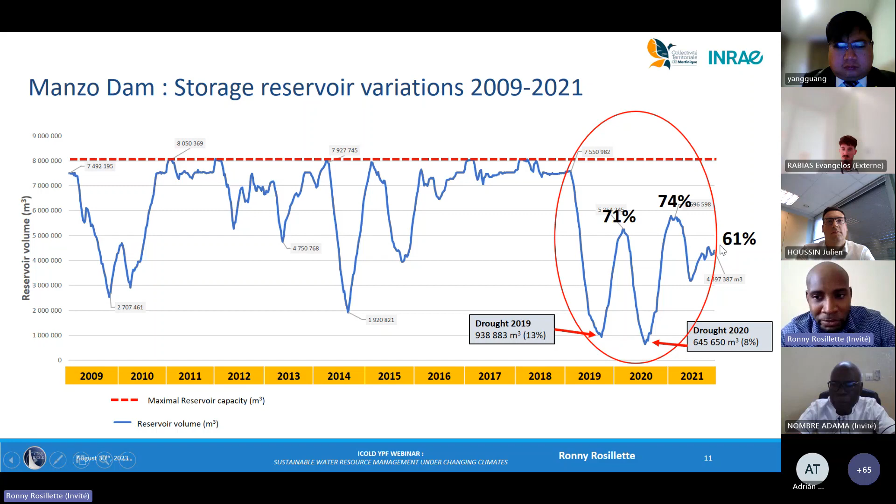And on the other hand, it's becoming challenging to fill up the reservoir. We reached 71% at the end of the rainy season in 2019, 74% and 61%. And in 2022, we reached again 13% here during a short drought, and we've reached there 82% because we implemented more water restriction measures, longer and more severe restriction measures in order to manage the reservoir and to reach that level, but it's not enough.

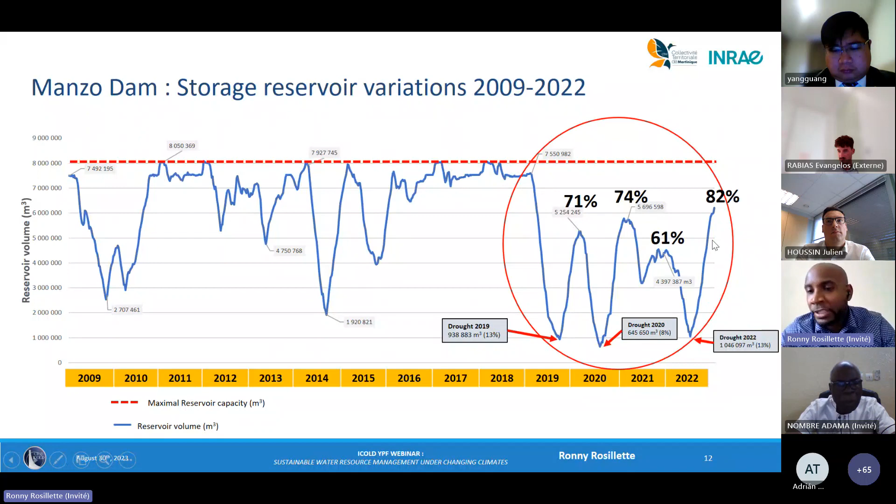So today, we notice that there is an increasing water demand. The total irrigation supplied is close to the maximal reservoir capacity, and some years is over that reservoir capacity, as it was the case in 2012 and 2015. And upstream on the Lézarde River, we're facing limitations in the inflow capacity and also the water intake efficiency, especially during the rainy days, because 600 liters per second is not enough today to fill up the reservoir in a minimum time.

So as a consequence, we have to implement more water restrictions, so they became more severe and longer. For instance, in 2022, water restriction happened 70% of the year to reach 82% of the filling reservoir.

So regarding the effects of climate change, numerical modeling was realized by the French Geological Survey, BRGM, based on climate projections of how the effects will impact the Martinique water resources over the next century. We're expecting warming temperatures with more evapotranspiration, especially in the southeast region, which is already drier. So there will be a higher seasonal variation. The wet season is going to be wetter and shorter, while the dry season is going to be longer and more intense. We're expecting less than 50% precipitation during the dry season, and it's going to lead to an increase in the soil water deficit.

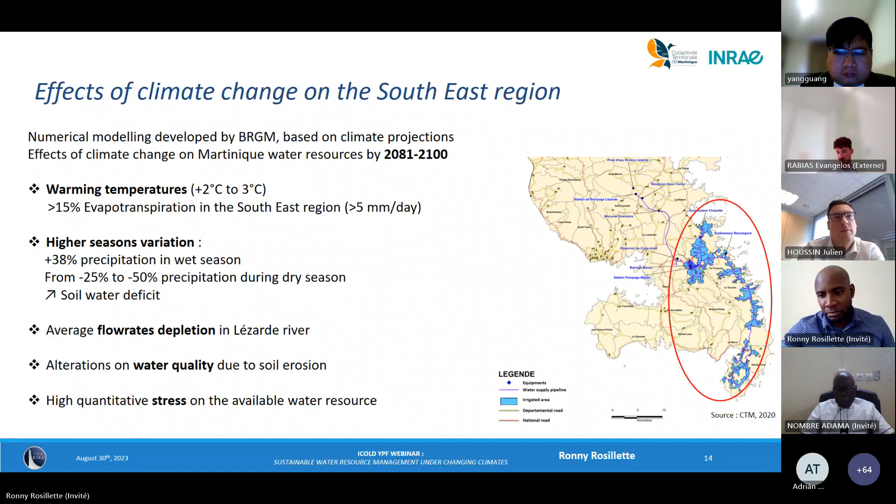So in conclusion, Manzo Dam, or on a larger scale, the Southeast irrigated area, has a crucial role in Martinique. It represents 30% of the total water supply and 80% of the total irrigation supply on the island. So Martinique relies on it. But today there is a decrease of the water supply combined with an increase of the water demand due to rapid banana expansion.

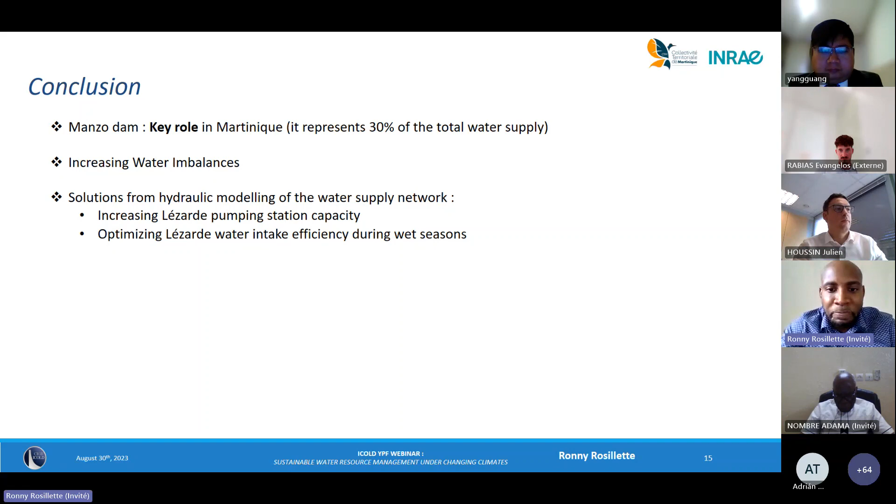There are some solutions on the Lézarde River from hydraulic modeling to increase the water supply, the water inflow, by increasing the pumping station capacity or optimizing the water intake efficiency in order to store that water during flash flood events or during the rainy days. But today, what we notice is the reservoir storage capacity is limited when the dry season is followed by a drier wet season. And also the effects of climate change are expected to be worse.

So as a Caribbean island, we have to be resilient and we have to implement adaptation strategies, such as a new irrigation master plan, which is currently in progress, and also a new hydroeconomic model. We have to make an assessment of the irrigation potential, like the reuse of wastewater supply. We have to also create more hillside reservoir storage and make a transition to crop diversification in order to increase our resilience to the next environmental changes. Voilà.

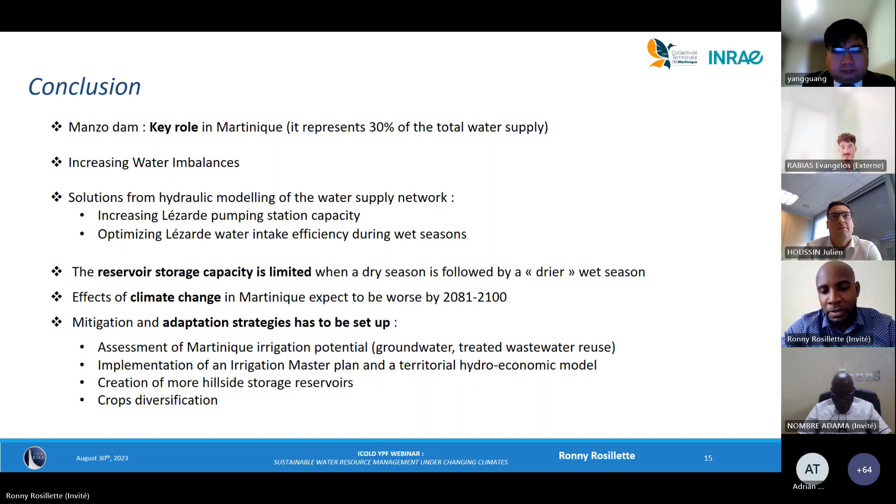Now we will get to the questions. If those who asked questions in the chat would like to read them aloud, so everyone can get the answer too. So, Niels, I will try to give you access to the microphone if you're still available. Don't give access to Niels for the microphone. He will not stop speaking. Okay. So, Niels, you might be able to activate your microphone if you want to ask a question.

Yes, I take that critique as well. I'll keep it short. You already answered my question initially in the chat, so thank you for that. Thank you for the presentation to everyone.

Yeah, but I guess to share it in plenum, my question was related to the fuse gates, whether they considered the kind of breaching wave that would occur. So both that kind of flood wave, but also with regard to what kind of possibilities are in other structures or other dams. I mean, this spillway shape, for example, might also be relevant to discuss, right?